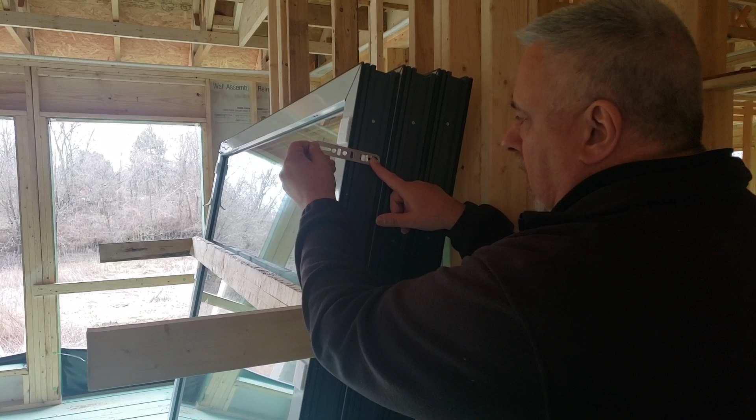So first thing up is these are the attachment clips. So you can see there's a couple teeth there that bite, and the window has this corresponding track here. So basically those clips just go in and rotate into place. And voila, that's as far as the clip attachment to the window. And then basically I tell the builders, fold that in like that.

So now we install the window. And the reason for the fold in is it just takes that edge out of play when you're installing the window and trying to shoehorn it in the rough opening. But the other thing is, understand that the window rough opening is an inch larger than the window unit itself. So we have to make up that ½ inch on each side.

So the minute I bend that and then I bend it back, you can see there's a space in here now so that when I screw this off, I've made up that ½ inch difference between the face of the window and the face of the rough opening. We just installed the window over there. Let's cut. We'll run over there and take a look at that window. I'll show you the operation of a Euro tilt turn window, and we'll talk a little bit more about the install. So let's head over.

All right, so we're over here at one of the double windows we just installed. Notice we have some holes. I grabbed one of the pieces of hardware. Let's talk a little bit about the operation of a triple glazed window. So obviously the downward position is the close and lock position. If I rotate the handle up 90 degrees, then I can pull the window open, and now that is the turn function, right? I have full access to the outside. I can wash the window, etc.

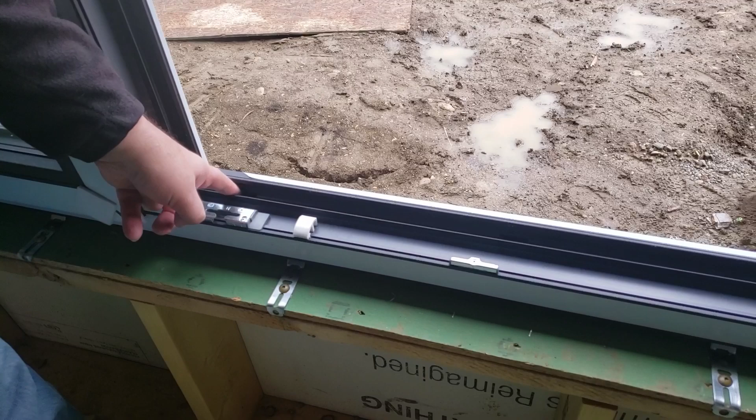And one of the beauties is that it's positively sloped. And if you open the window here, and if you look down here, you'll see that there's weep holes down here in the frame. So any water that comes down that sloped window is just going to go down into that track and basically weep out. So the windows have their own self water management system in place.

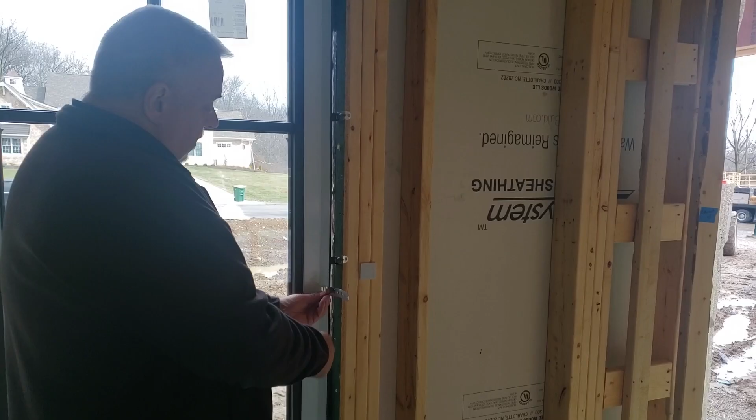And you can see here, there's my clip. The clip that I pulled off the window there, and you can see that's how it has that bend. And you can see also here, so we put those in, they're attached to the window, and then they're basically pushed up against the rough opening there. So that's basically sitting in there like this, and it just simply gets screwed off.

Now on these windows, we're gonna have a drywall return. So the drywall is gonna come, turn 90 degrees and go into and butt that edge of the window there on 3 sides. We have some nice hinge covers that'll go over there that match the hardware. These are some beautiful black windows. It's a true simulated divided light. So absolutely gorgeous windows. This one's probably somewhere around R7 or so compared to an R3 domestic product. So we're a little better than twice as good, which certainly elevates the whole wall R value of the system.

But anyways, let's head back to the studio. We'll break out the sill detail here, and we'll talk about this insulation detail with Big Red. I'll see you back at the studio.

Hey, everybody. Yeah, beautiful windows going in there, huh? Love those things. Always a treat to get out there and install some. Notice we didn't install the 11-foot by 6-foot window. It was a good choice. Start out with the smaller ones.

Anyways, great windows. Got a really good window detail here. Got Big Red, we got time, we got video. Let's get after it. Very excited, I got to tell you. Window sill details are probably my favorite to draw. Yeah, I'll go out and say it. They are my favorite to draw.

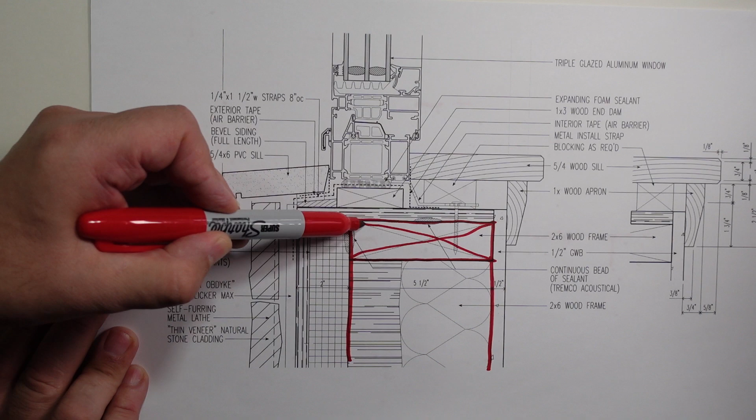So let's talk about where we're at here. Here is the 2x6 wall. There is the sill. Here is our ZIP R9.

Let's see our 7/16 there. This is our R9 panel. I'm not going to talk about insulation today. We always talk about insulation. But we are going to talk about our weather-resistant barrier continuity.

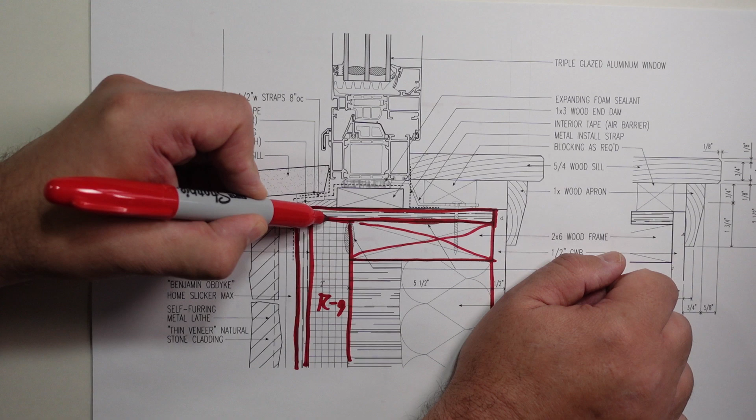So we run a piece of ZIP in here. And that's just straight up 7/16 ZIP. That is not the ZIP R9. That is just the standard 7/16 ZIP there. And that basically gives us the platform to then begin our window install.

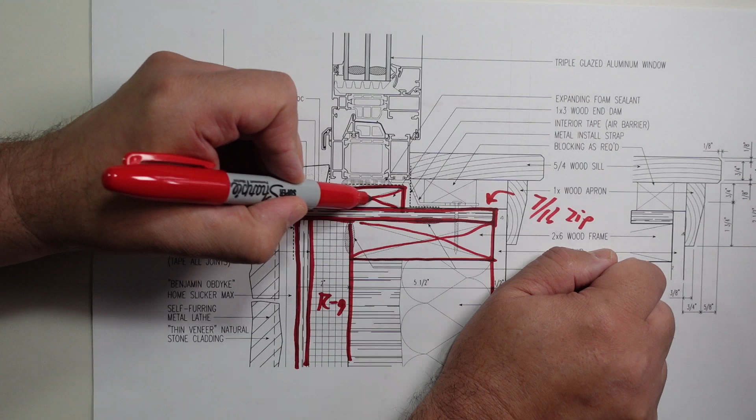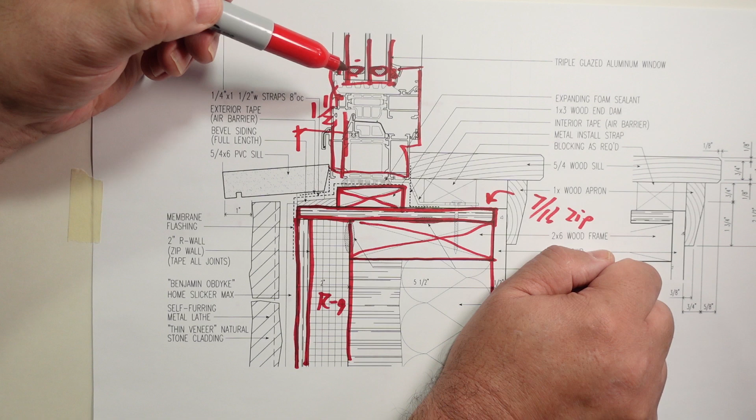So you can see here, we have a block there, 1x3. That is set inside here. It's about 1.5 inches, I believe we had that at. And you can see up here, this is our old triple glazed window here, and you can see the 3 panes of glass there. 2 spaces, Swiss spacer, all good stuff.

But notice there's a little bit of space there. Out there, we actually directly applied those to the top of our block. We're going to talk about a couple other steps there, but sometimes we'll put these on little blocks if the sill and everything isn't quite perfectly level. We did check it, and they were spot on.

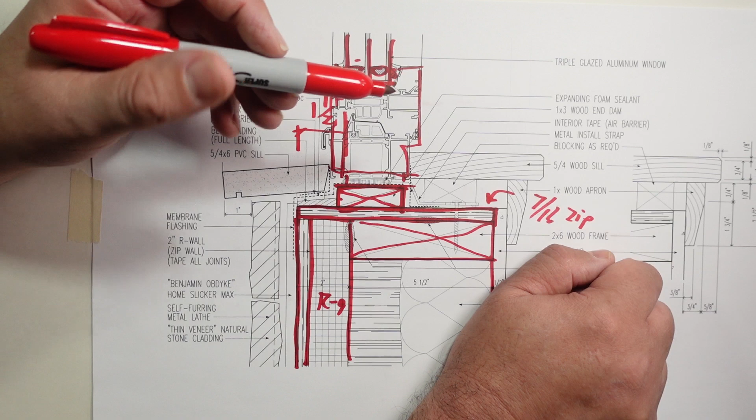You can see actually the metal clip is right there, and it comes in and goes down, and there's that bend that we talked about, but it turns into the channel right there, and that's what locks it in. And then you can see we have our screw here that we screw that down.

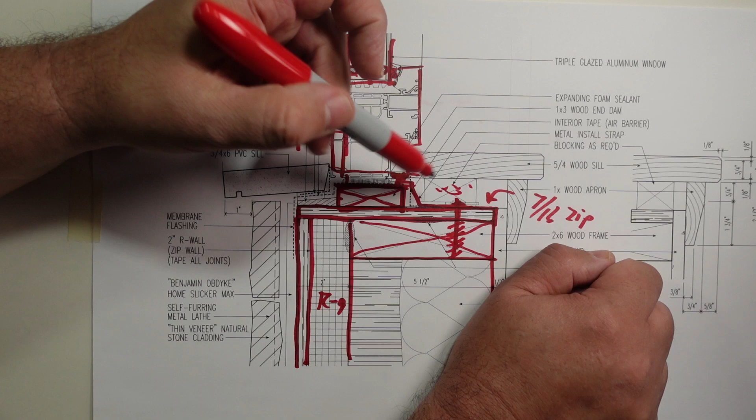This blocking here, that's just some intermittent blocking that will allow us to put our finished sill in with the finished carpenters, but we're more concerned about the install here. So we have our 1x3, and then we have our little sloped piece of cedar here. And you can see here we have membrane flashing. This is where we were using that stretch tape, basically because it conforms nice and neat.

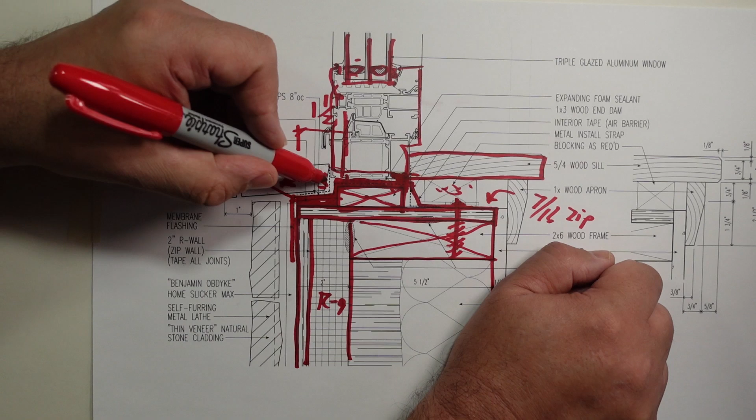And all I really care about is that we get that stretch tape up to the inside of that block. So it runs along the top of the block, it drops down, makes that little sill pan there. But then this is sloped, and it's not a really strong slope. It is just a piece of bevel siding, but it is full length, so it goes the full length of the window opening. So does this block. They're not intermittent, they are continuous.

And then we have the ZIP stretch tape. And as far as this is concerned, if we get 2 inches there, I'm certainly more than satisfied. We basically want to get by this joint of the ZIP R9 and our ZIP liner to the window. And if we can get by that by about 1 inch, that's a really good rule of thumb there. And then basically we sit our window down on that.

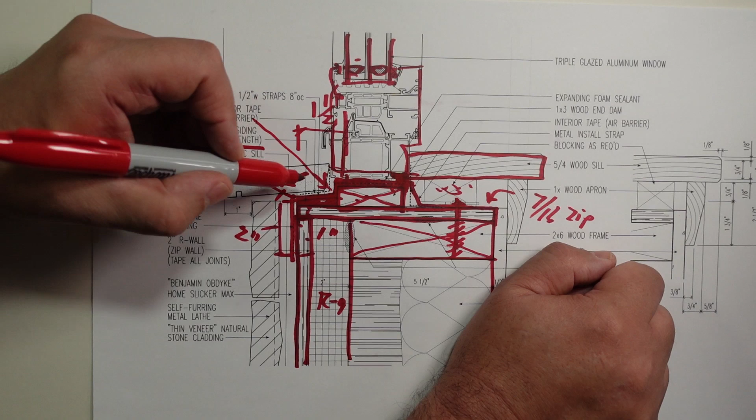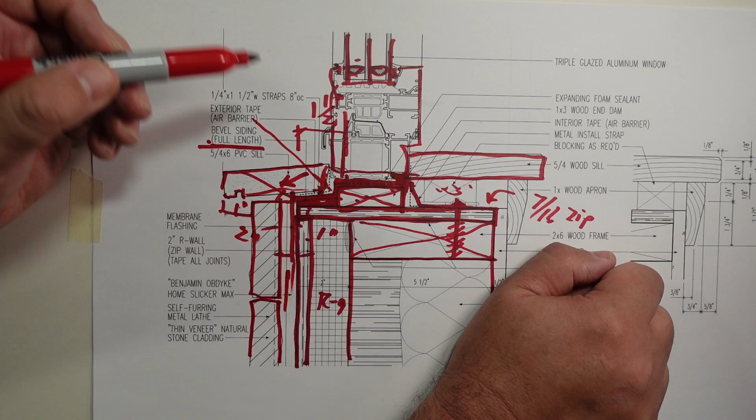And then to finish it out, we do put some shims there, and you can see this is our finished sill here. It has a little drip to it. So however far we call out for 1 inch on this project, we actually have a synthetic stone or cut stone, thin stone veneer here. So we have our metal lath and our Benjamin Obdyke Home Slicker Max with a self-furring metal lath that gets placed on the face of that, and then the thin veneer natural stone cladding would get applied to that system.

We have some other areas where it's lap siding. I just chose to grab the detail. I actually do the detail for both sidings because sometimes the sill dimension and stuff changes.

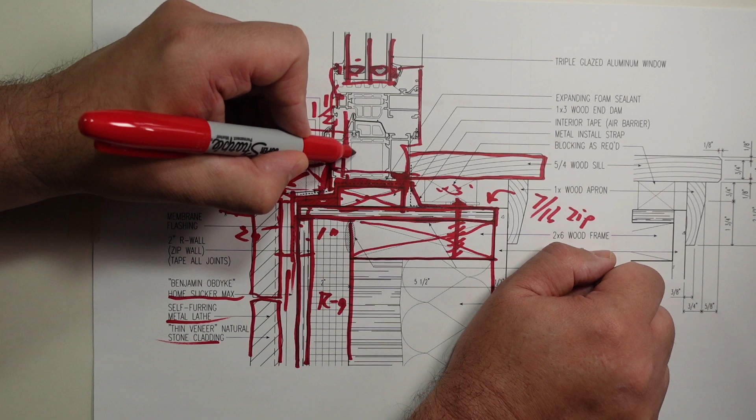But finally, after all of this, and I know Big Red is starting to get really red here, we come in and we'll use some Siga tape and basically tape the window, and we're only biting that window maybe 1/4 of an inch, and then we tape to the face of that sill there, and that's our exterior air barrier.

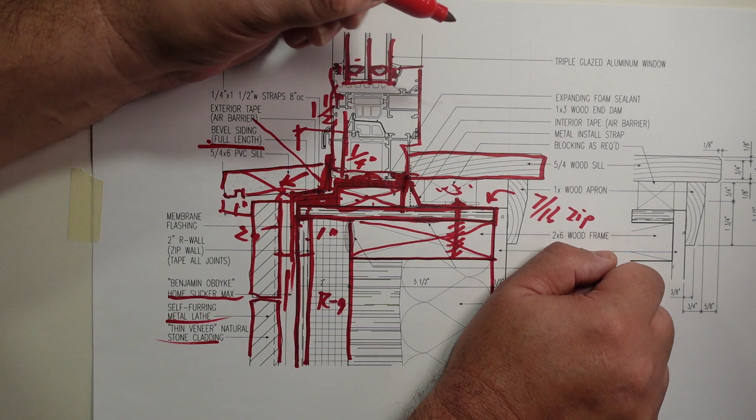We'll go in and if you put spacers there, we would use a foam sealant, but if we're going to set the window right down on it, we would just hit that inner joint there with some sealant, and then you can see here we have an interior seal, and that same 1/4 of an inch applies to the tape seal there. So what we're basically trying to do is you have your wall sheathing here that if we didn't put the window in, it would just be continuous, but we would have a house without windows.

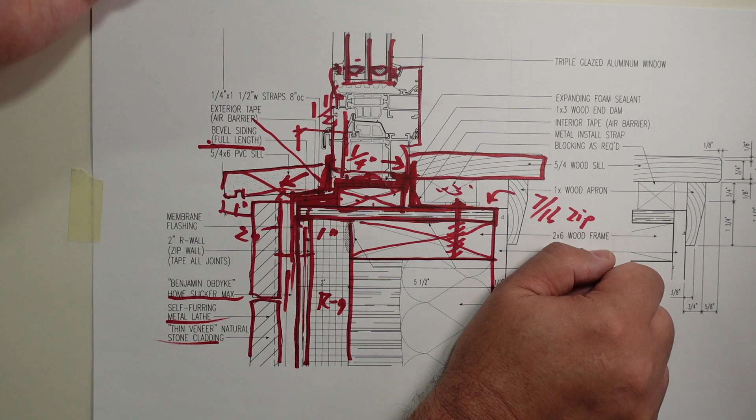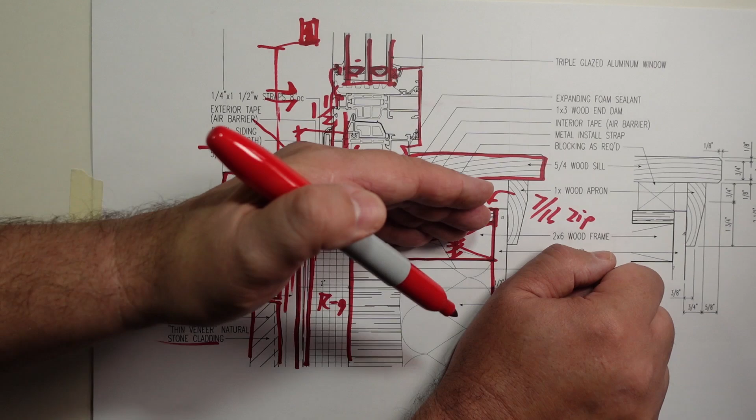So the minute I go and I cut this opening into the system, then I have to figure out a way of how do I connect the cut piece of my weather-resistant barrier there to the cut piece of my weather-resistant barrier up here. So again, basically, we cut it out, but we fold it in, and you see there, and we'll do the same at the head, and then we need to just find a way where our window is actually our weather-resistant barrier in the opening.

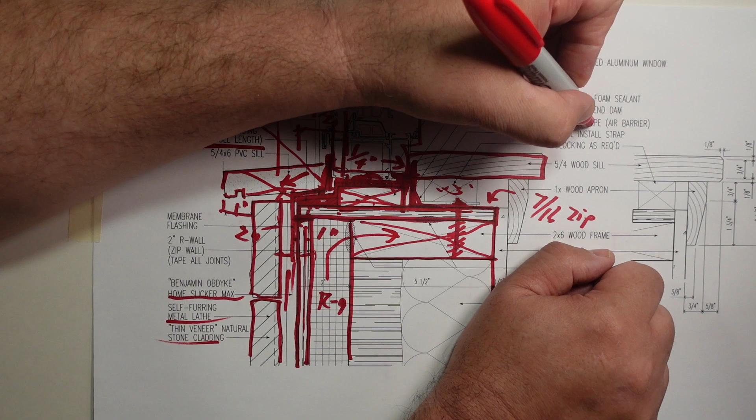So we have to make those connections to, you guessed it, my favorite word. I can use this in almost every conversation about building science. Continuity, continuity, continuity. So anyways, there you have it. A little dissection of a windowsill detail, courtesy of Big Red. There you go. Big Red, done.